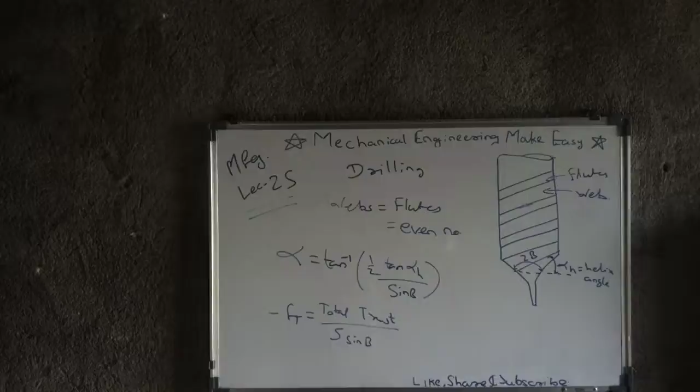This is the 25th lecture and today we are going to cover drilling operation. This is the basic tool geometry of drilling operation.

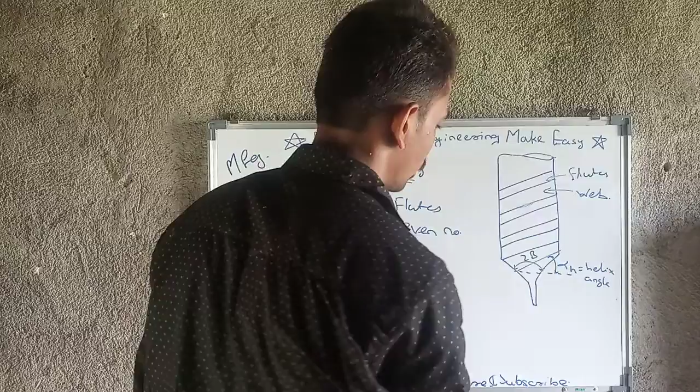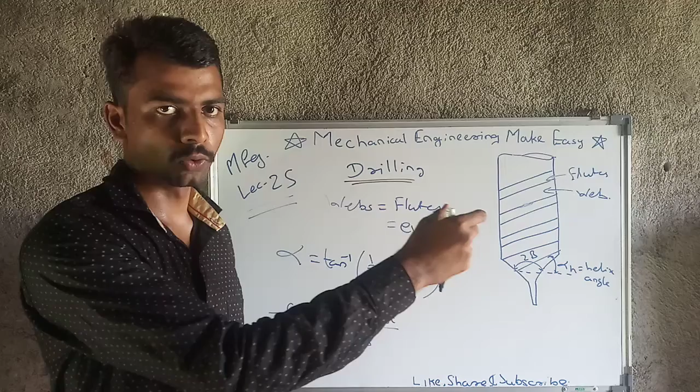There are alternate flutes and lands, and those flutes and lands will be having the same amount. Like if flutes are 4, then lands are also 4, likewise, and that will always be an even number.

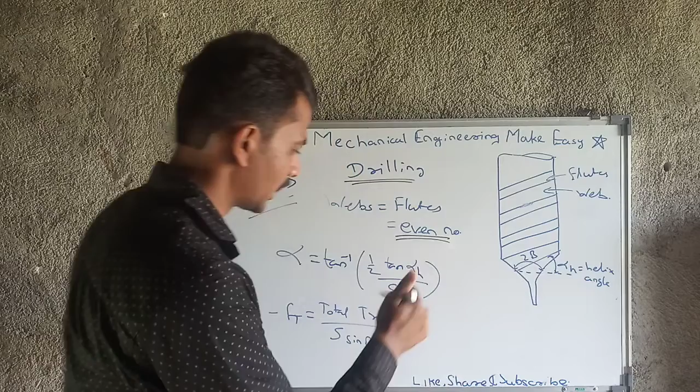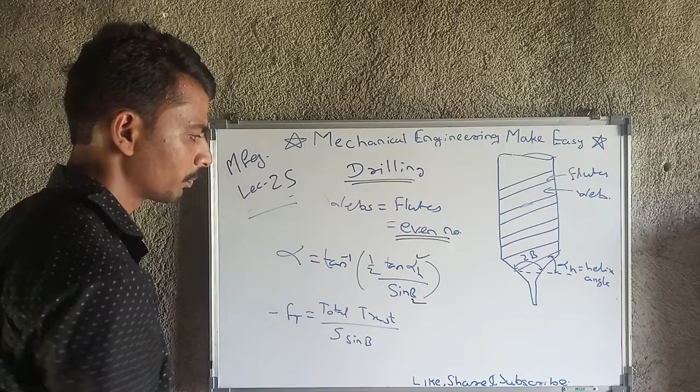Then another concept is the helix angle, that is alpha h. And beta is nothing but half of the point angle. The full point angle is 2 times beta, so beta is half of the point angle, and from that alpha h and beta we will get to know the value of alpha. This alpha value is too much important while calculation.

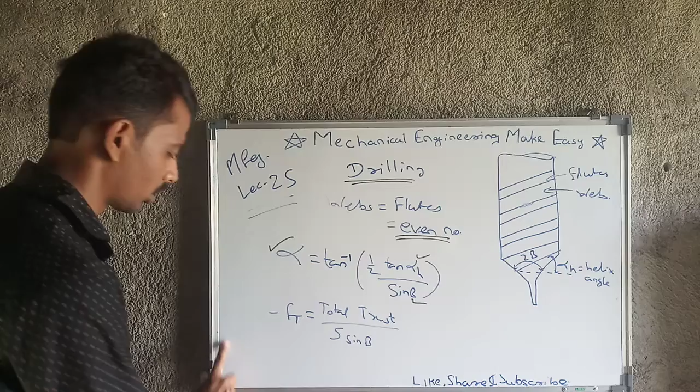Then there is another formula, that is thrust force Ft, which is equal to total thrust upon S times sin beta. What is thrust force? Thrust force is nothing but total thrust upon S sin beta.

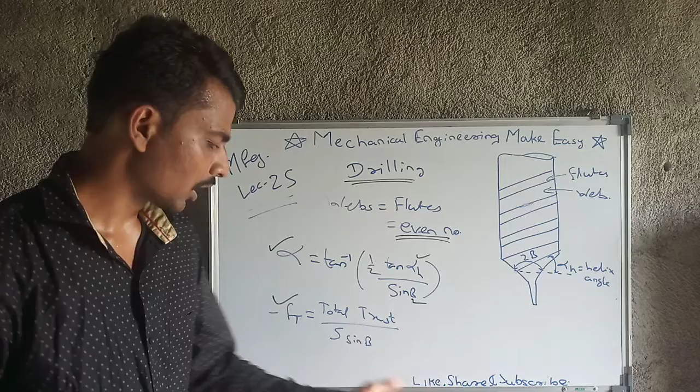I am providing you all the formulas so that according to the numerical, whatever data is given, you will get to know how we can get the required value.

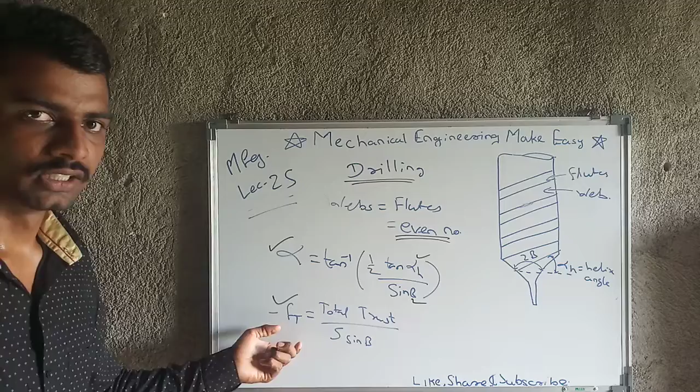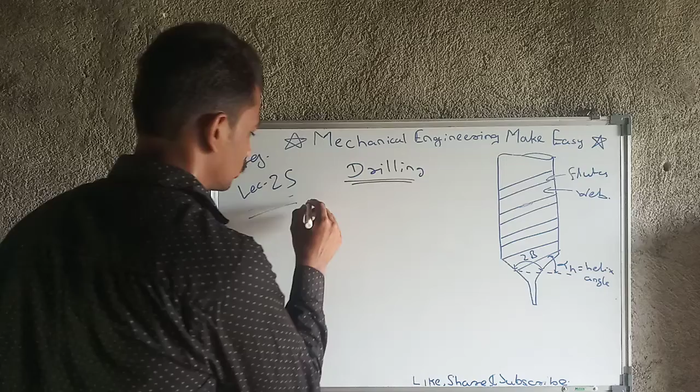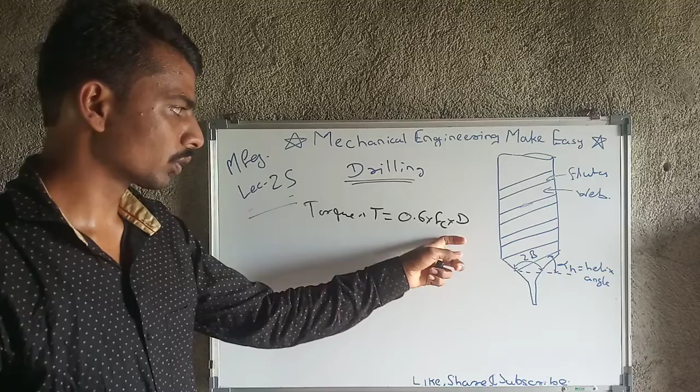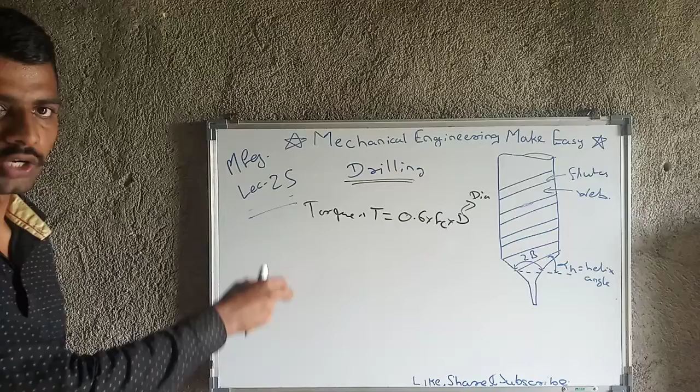Then another parameter is torque. T is equal to 0.6 into Fc into D. So this is one formula, and there is another formula too, but firstly think about this one: 0.6 into cutting force into d, that is the diameter of the drill bit. This is cutting force, and previously we took into consideration the thrust force. These two are different parameters.

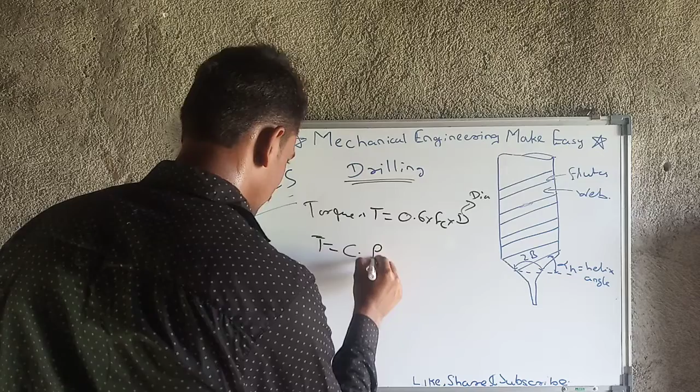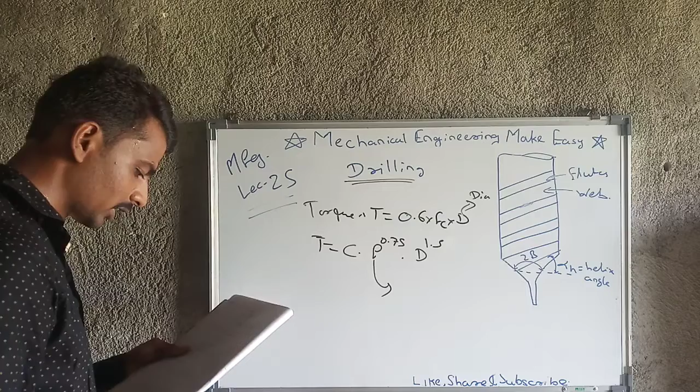Then there is another formula for torque, that is equal to C into F raised to 0.75 into capital D raised to 1.5. We know D is the diameter of the drill bit. Then another parameter is F, which is our feed, and the remaining is C, which is a constant.

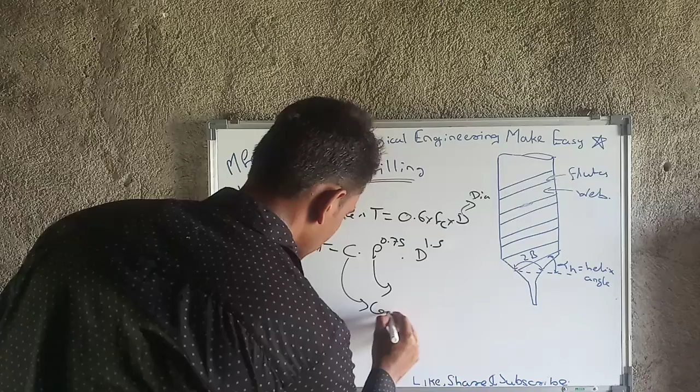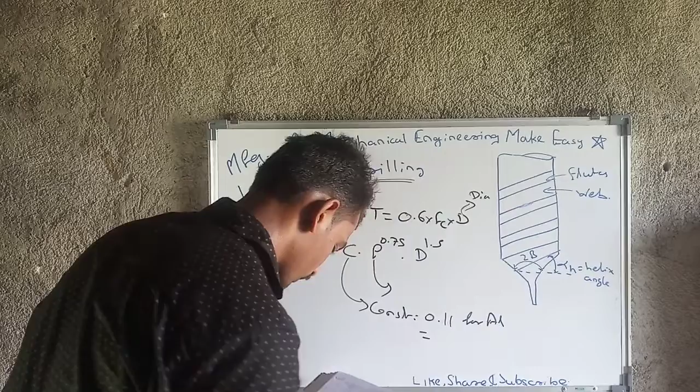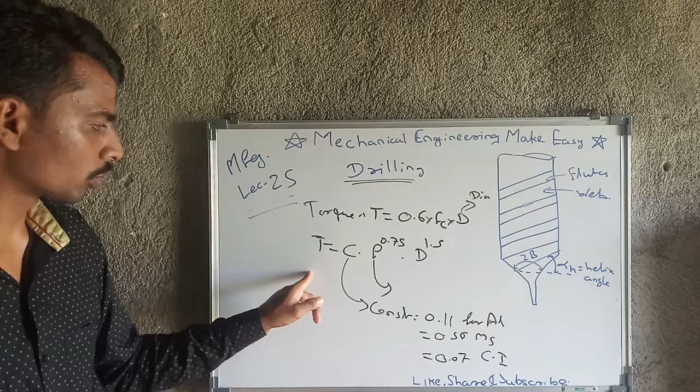The value of C varies, like 0.11 for aluminium, then 0.56 for mild steel, then another value is 0.07 for cast iron. So, C for aluminium is 0.11, for mild steel 0.56, and for cast iron 0.07. Note down these formulas and the values of C also.

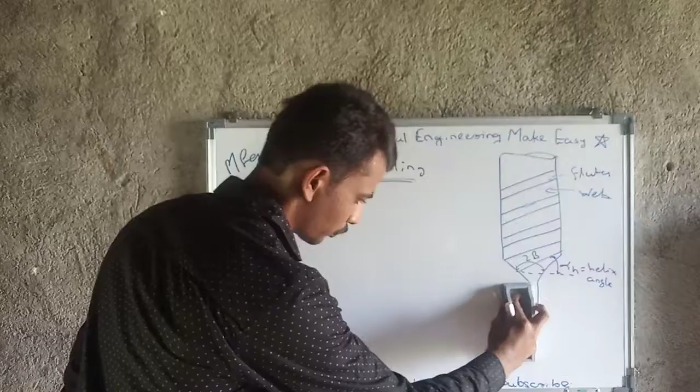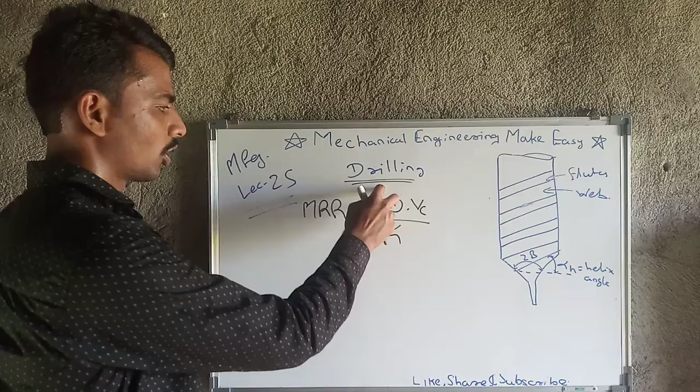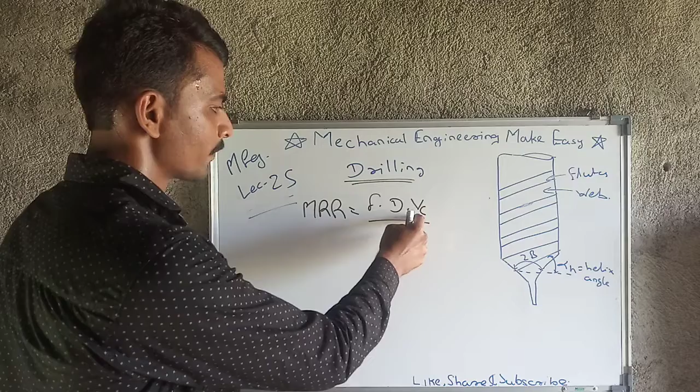Then we move to the next parameter, MRR, that is material removal rate, which is too much important for all operations. MRR equals F into D into Vc upon 4 - feed into diameter into cutting velocity, upon 4 which is constant. So MRR is dependent on feed, how much in mm per revolution or mm per minute, then D is diameter, Vc is cutting velocity, divided by 4.

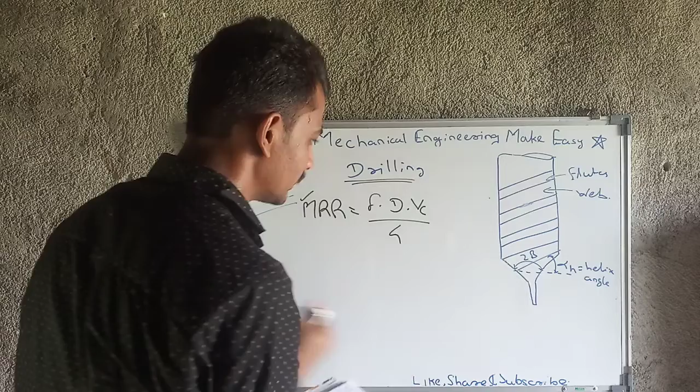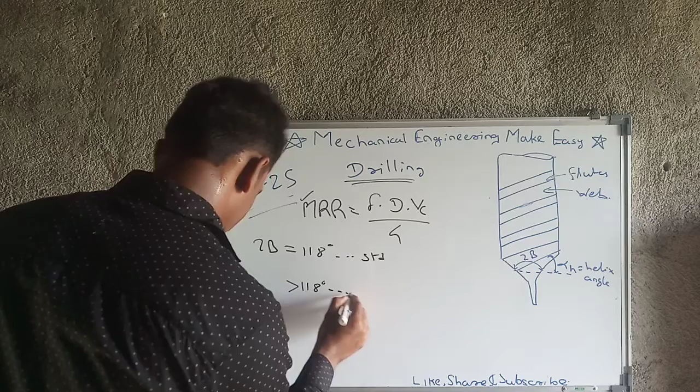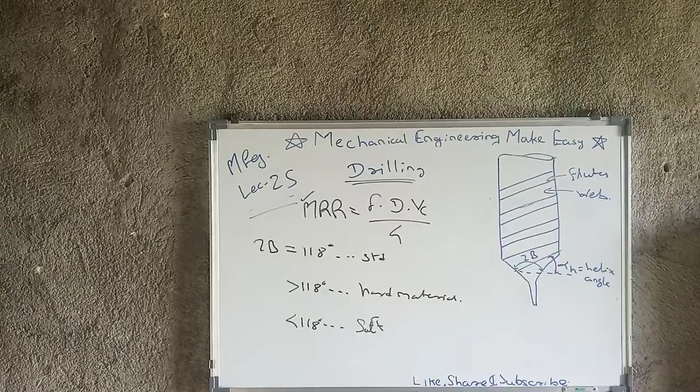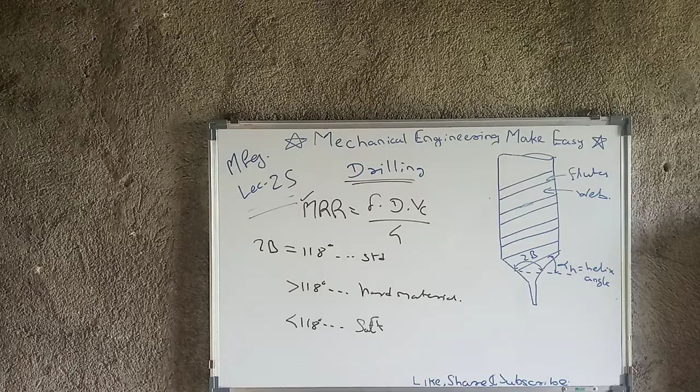Then we have some standard values for the point angle, that is 2b. 2b will equal 118 degrees for the standard case. If we have to machine hard material, then that angle will be greater than 118 degrees, and it will be less than 118 degrees for soft material. So according to our material, the standard angle of 2b is 118 degrees, but for harder material we use an angle greater than 118 degrees, and for softer material we take the point angle less than 118 degrees.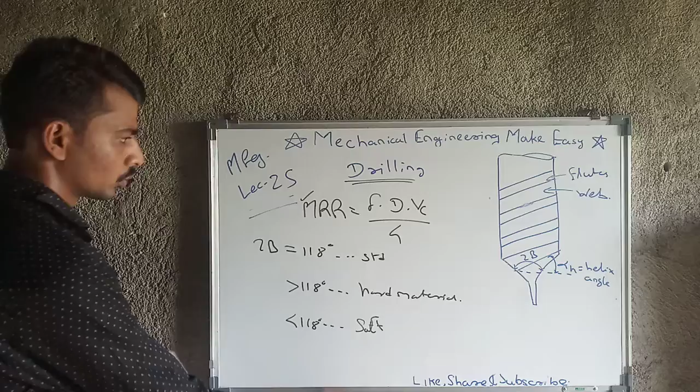Note down this also. Then we move to the next parameter, operations we can perform on a drilling machine. On a drilling machine we can perform a number of operations like drilling, then reaming.

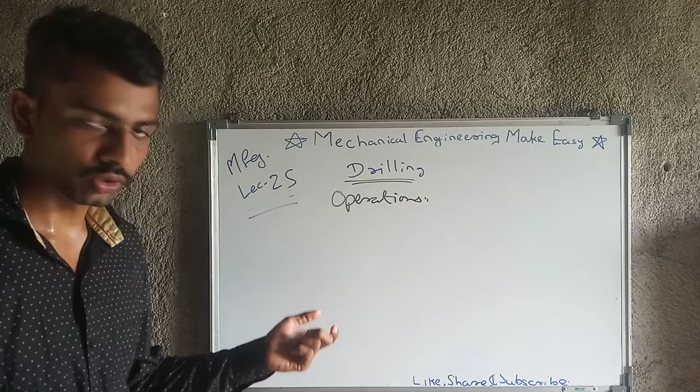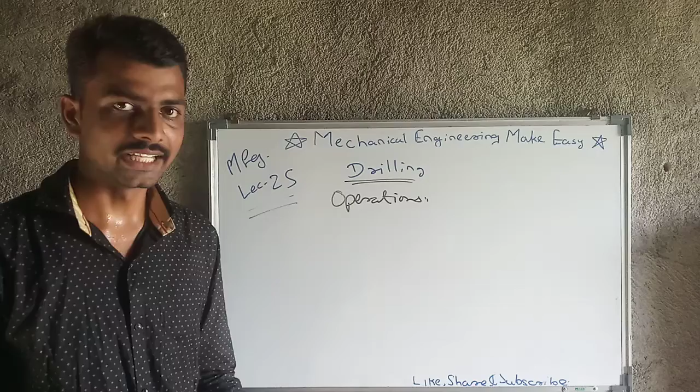Drilling is exactly what I have shown you, to drill a hole on any component, which may be on sheet metal, any metal box, etc. Then what is reaming? Reaming is when there is an existing hole, but we have to finish that hole, provide some finishing action on it. That operation is reaming.

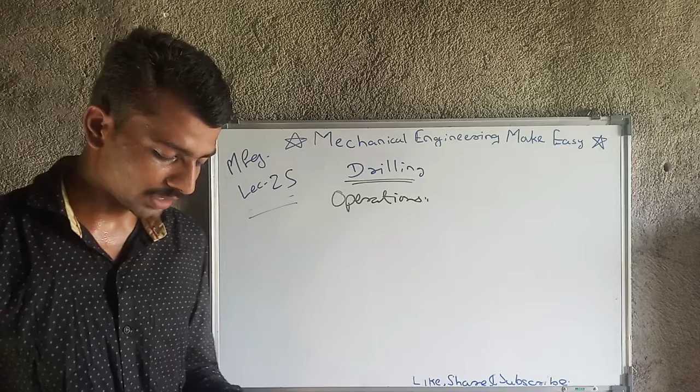Then another is boring. Boring is when there is a hole already, and we are going to increase the diameter of this hole, that is the boring operation.

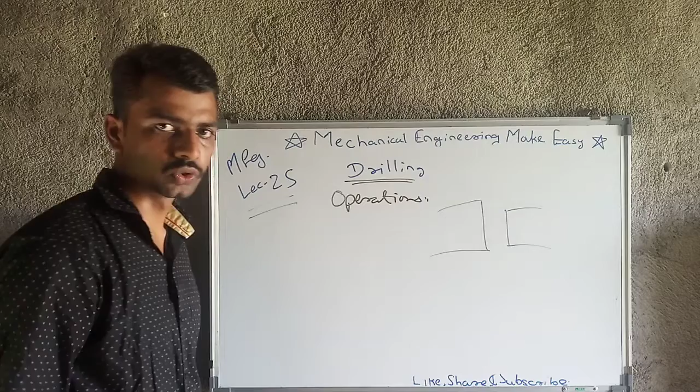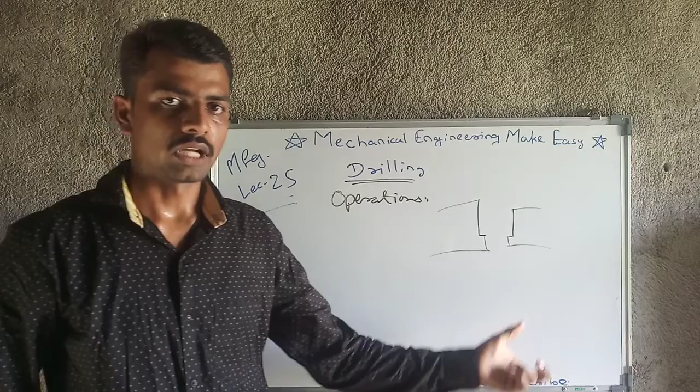Then next is counter boring. Counter boring means only enlarging some limited portion. For example, we enlarge only this much amount of portion, so this is counter boring. In normal boring, the hole is bored and all the area is increased, but in counter boring, only some part is enlarged and the other part remains as it is.

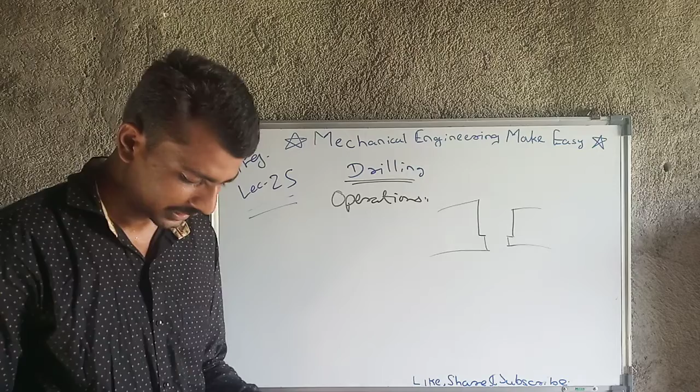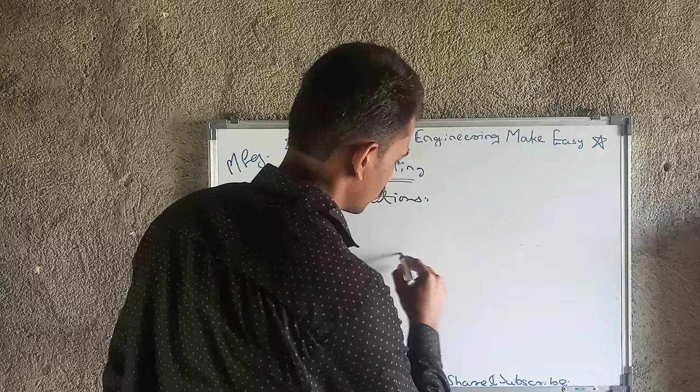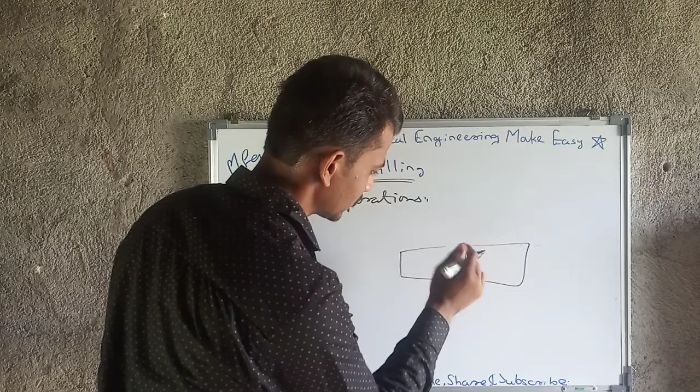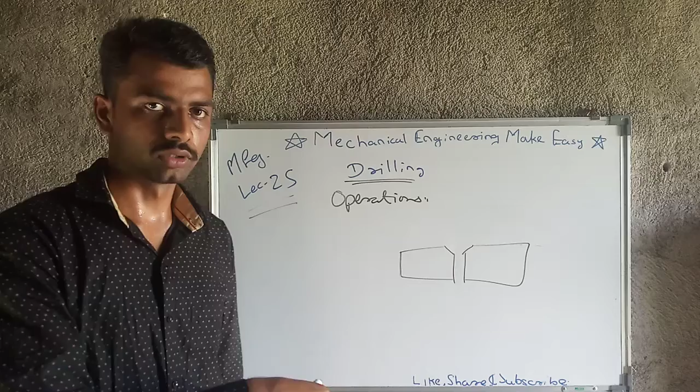Then another operation is spot facing, meaning at only the portion here maybe there is some burr or etc., so we are just putting the tool there and taking it out. This is nothing but spot facing, for removing burr or etc.

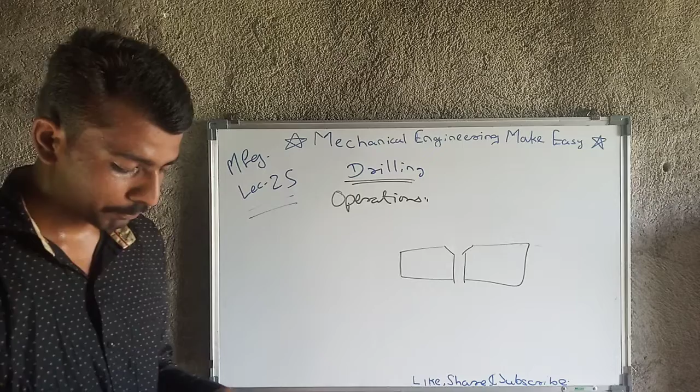Then another is tapping. Tapping is nothing but internal thread generation. If we have to generate threads here, then that operation is nothing but tapping. That also we can perform on a drilling machine.

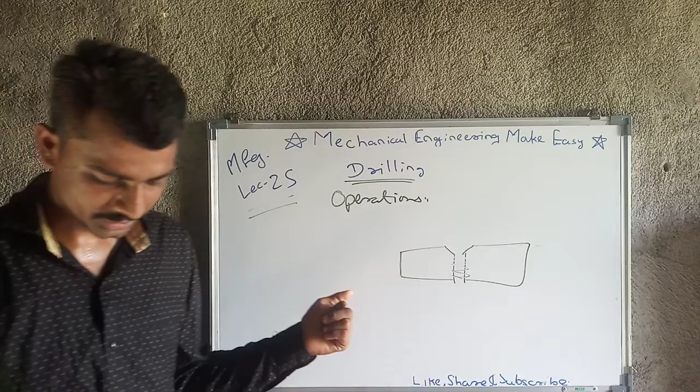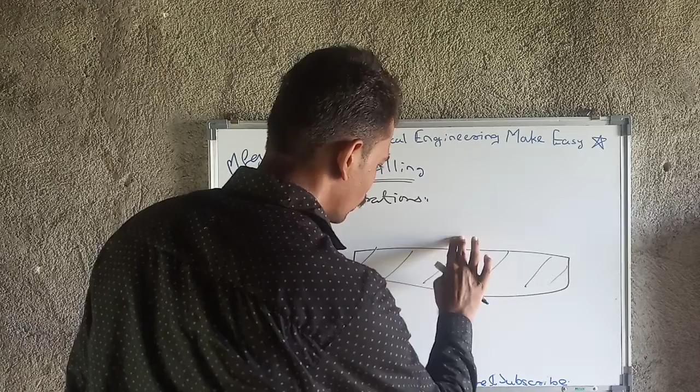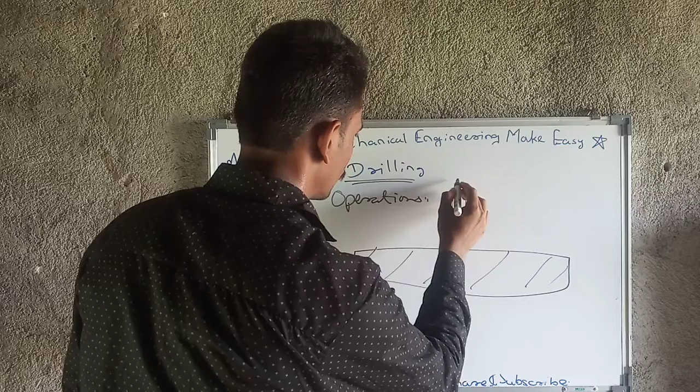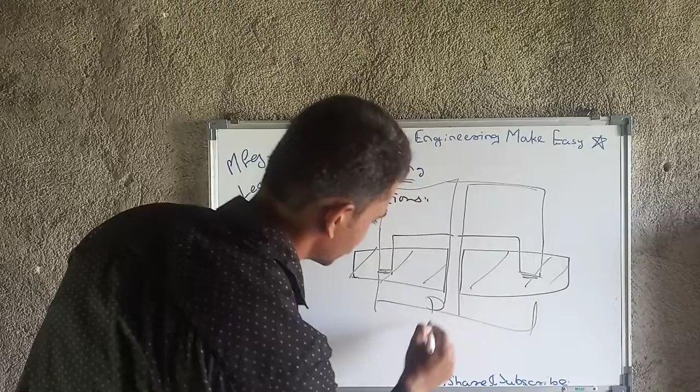Then another is trepanning. Trepanning is a special type of operation which we can perform. For example, this is one workpiece and we have to drill a large hole here. So firstly what we will do, we will drill one small hole here, and the tool will pass likewise, and that tool will have extended portions. Because of this, this part and this part will cut the portion of the workpiece.

So ultimately this much large hole will be generated, and this operation is nothing but trepanning, meaning firstly drill one small hole and fix the cutting tool there, that is the trepanning cutting tool, and that trepanning cutting tool will rotate and ultimately the cutting action will happen and the enlarged or large hole will be created. This operation is nothing but trepanning.

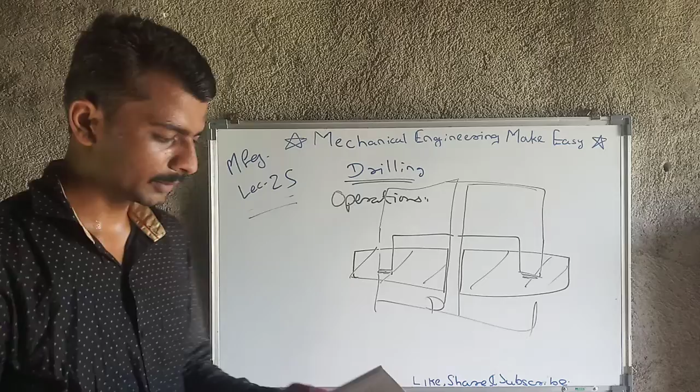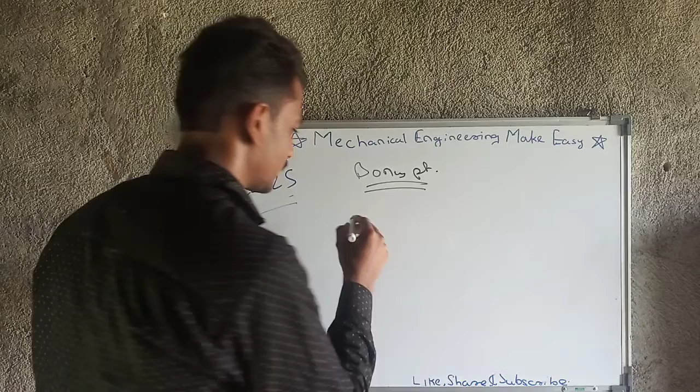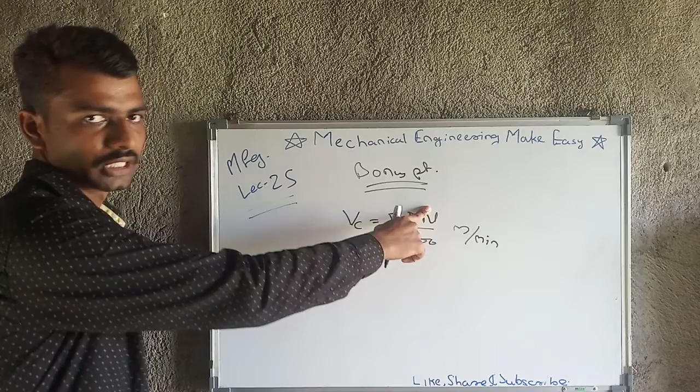So what is the bonus point for today's lecture? That is nothing but cutting speed. In case of drilling, what is the formula for cutting speed? That is VC, which is equal to pi d n by 1000, and the unit is meter per minute. This D is diameter of the drill bit, n is revolution per minute, and 1000 is only a constant. So this is the formula for cutting velocity.

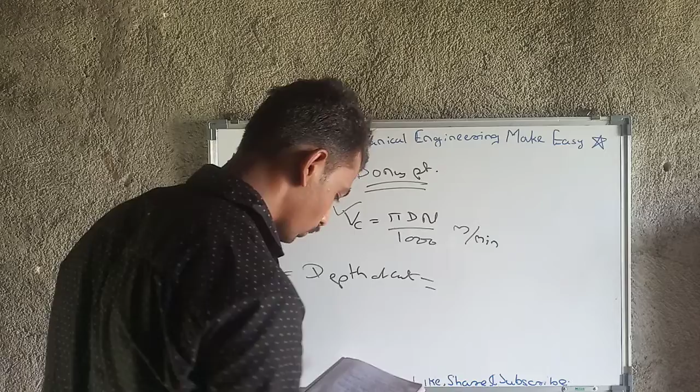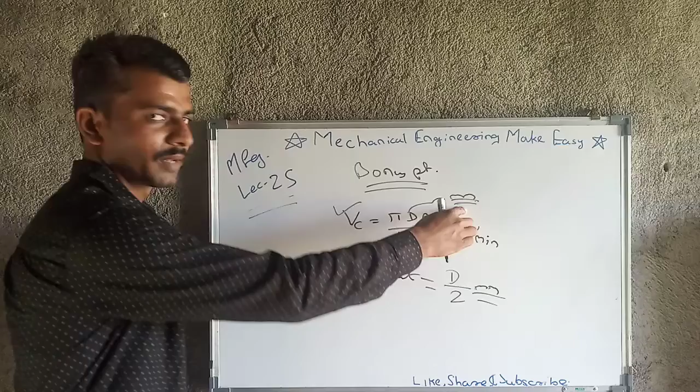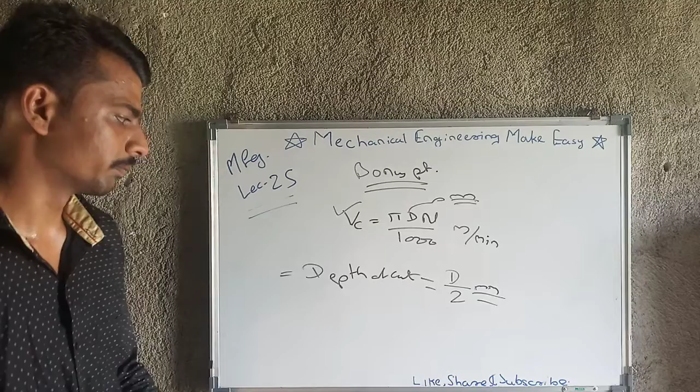Then there is another formula, that is depth of cut. Depth of cut will always equal drill diameter upon 2. If drill diameter is D, then D by 2, and that will be in mm. Why is this in mm? Because we have put 1000 here, that's why ultimately it will convert into meter, and this is revolution per minute, so the unit has no problem. In case of depth of cut, it will always be capital D by 2, and that value will be in mm.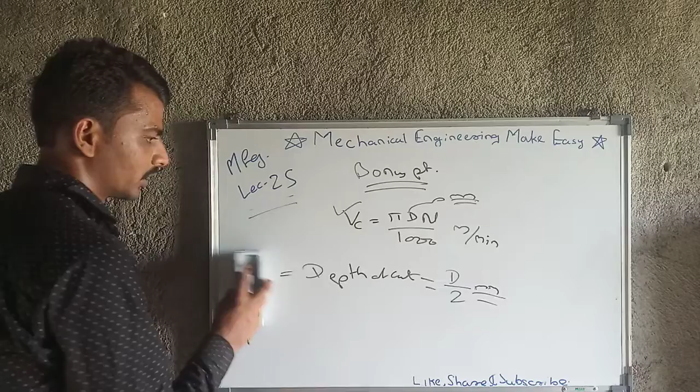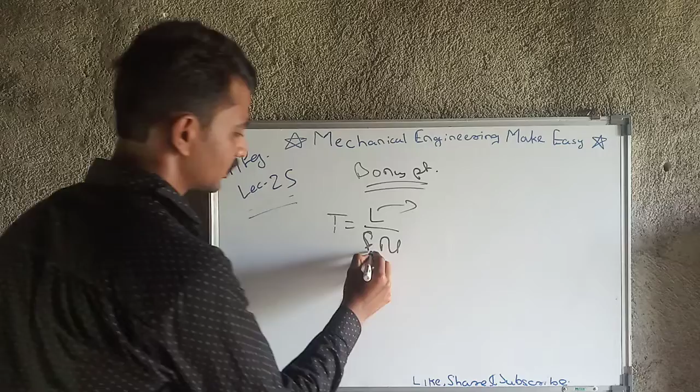Then machining time. For every operation machining time is important, and that machining time is also the same here, that is L upon Fn, the length of tool travel, which may include the approach length and overrun length.

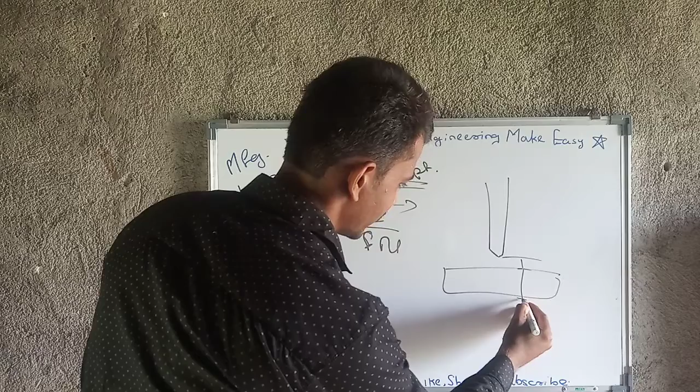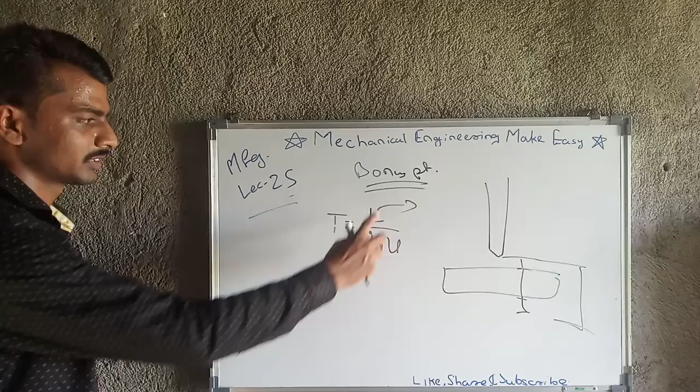What is approach length? If this is the workpiece and the tool is placed here, this is the approach length, meaning the tool has to travel this much distance to start cutting. Then there may be a requirement of some overrun because of this conical section. So grossly we have to cover this much distance, and that's why the length of tool travel is too important.

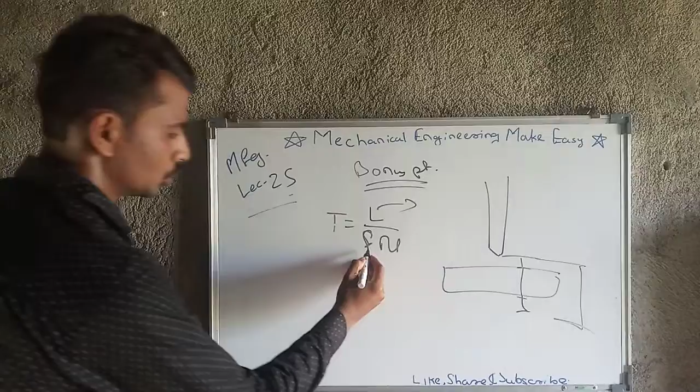Now we will move to the next point, but before that you should know what F and N are. F is nothing but feed, that is in mm per revolution, and N is nothing but RPM, revolution per minute, that is speed.

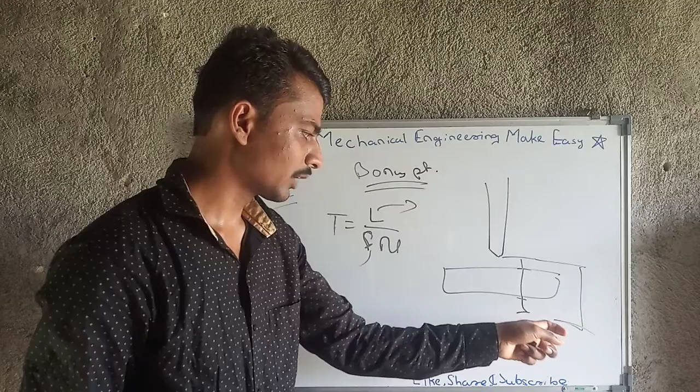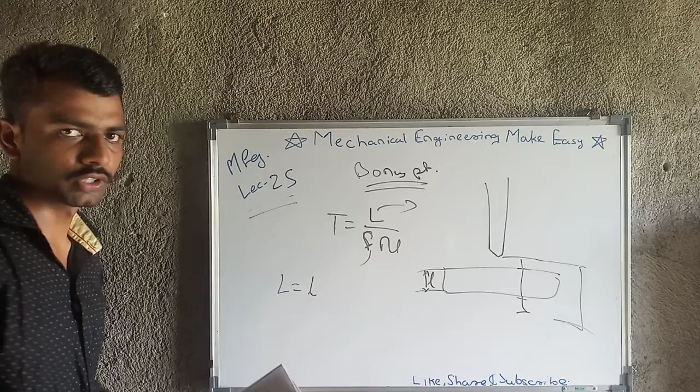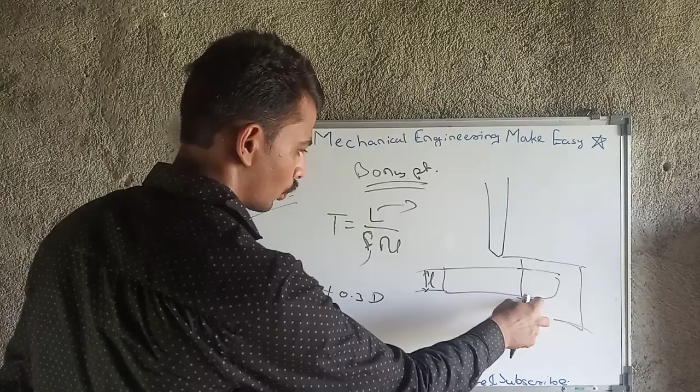What I have given you an idea about, that is L, the approach length and overrun length we have to consider, and generally that L value is equal to this, which I have denoted with small l. There may be denotation like T or etc. L plus 0.3 times D. Generally the approach length plus overrun length will come up like 0.3 times D, that is diameter of the tool.

But again this will vary according to our numerical data etc. But if you haven't been given any value, then you can take this formula into consideration and calculate the value of T, that is the machining time.

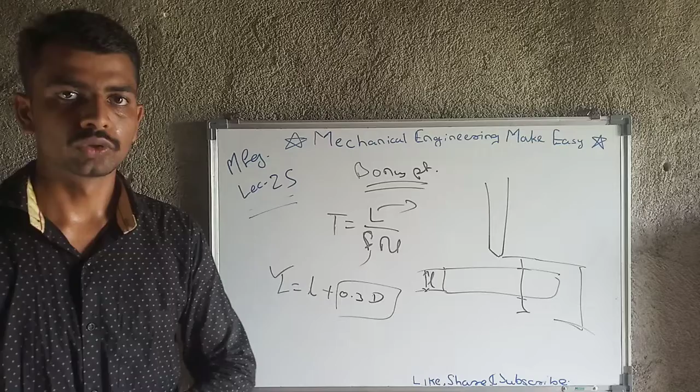So this is all about drilling, and next lecture we will come up with the milling machine.